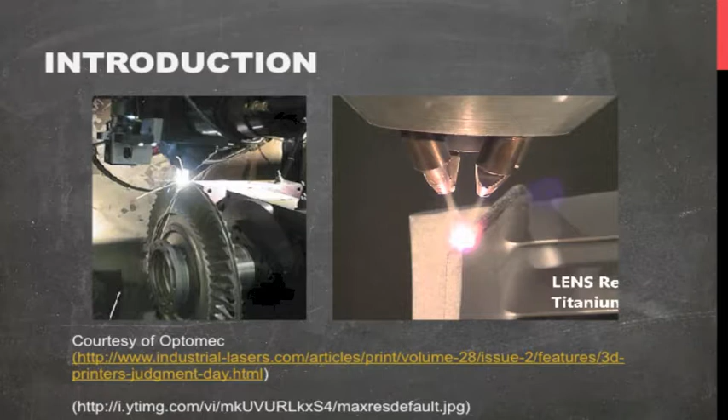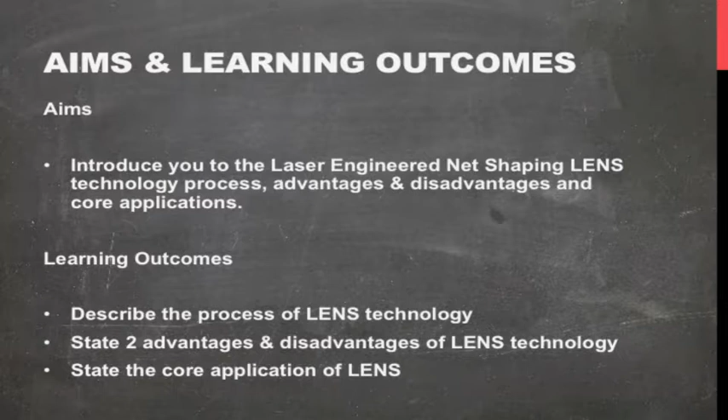So the aims and learning outcomes of this episode are very similar to the previous episodes: I'm trying to introduce you to the laser engineered net shaping technology, to understand its process, its advantages and disadvantages, and to know its core applications and use. So hopefully you'll be able to achieve these aims. So let's begin with understanding the process of this method.

The material used in this method is powder based. The powder is fed into a nozzle, and in this nozzle a laser is shined in the middle. The laser melts the base metal and the powder is deposited on this molten melt pool. As such, the part is built additively.

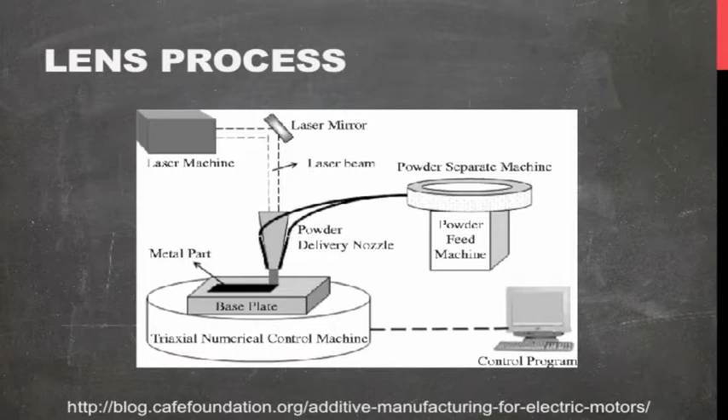The feature that allows the LENS process to repair components is that the base plate can move in different axes or it can rotate. So it allows the deposition of the powdered material onto surfaces that are not necessarily flat. So this is a very interesting feature.

Now if we look closer at the very specialized nozzle, you can see that this is very similar to some kind of welding mechanism. There are delivery nozzles for the powder, there's also a nozzle for the shielding gas, and the laser beam is shined in the center. So this is like a laser cladding, a metal cladding kind of process.

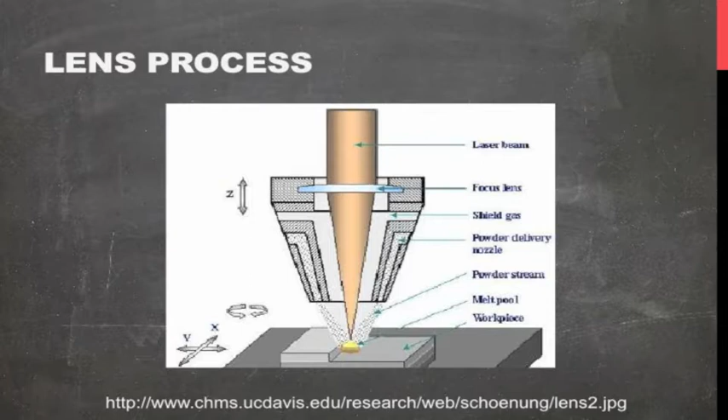So now let's move on to the advantages and disadvantages. For the advantages, the platform can move in various axes and planes, so it allows the additive deposition of the powder into the melt pool, which enables the repair of components. The second advantage is that since it is like a welding laser cladding kind of process, the build rate is very quick, and a wide range of materials can be used because you're basically just spraying the powder into the melt pool.

As for the disadvantages, firstly, output parts from this process have high surface roughness and the resolution is not so clear, mainly because the spraying effect is quite random. Another disadvantage is that it's probably quite hard to do overhang structures because you have to build support material. Currently I've not seen pictures of the LENS technology that show intricate support structures.

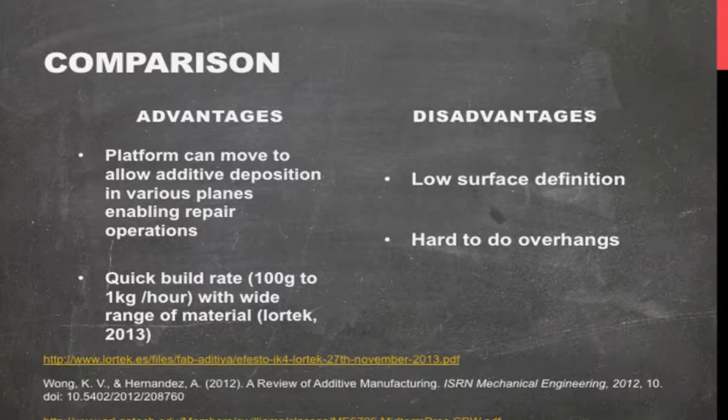So now let's move on to the applications. As you already know, the LENS system is very good for component repairs. This allows parts to be repaired quicker compared to conventional methods, where it would be quite difficult or almost impossible. Another application is that LENS could be used to create medical implants, like perhaps an entire bone.

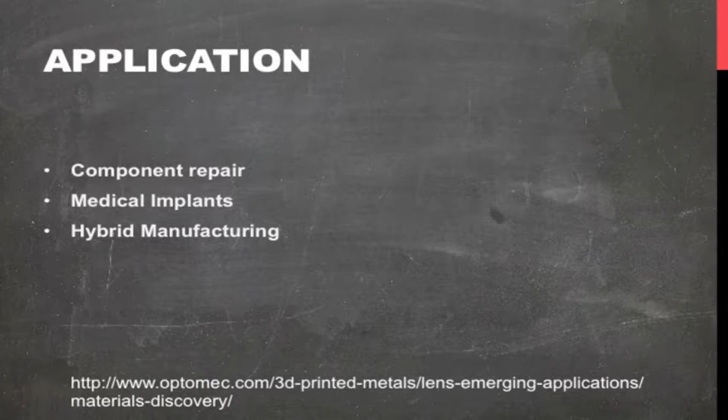Next is its use in hybrid manufacturing, which is quite similar to the repair application. Firstly you build the part up additively, and then you use subtractive machining to ensure the surface finish is very good. So this utilizes the advantages of both additive and subtractive manufacturing. This is actually quite a promising application, I'd say. So yeah, moving on to the summary.

I'm not sure why, but I'm feeling a bit tired on this video. So I'll just try to bang my head against the wall and get this video out.

So I hope you learned a bit about the process of LENS, even though I'm not very sure on this technique, and I hope you know its advantages and disadvantages, which I searched on the web, and the applications relating to it.

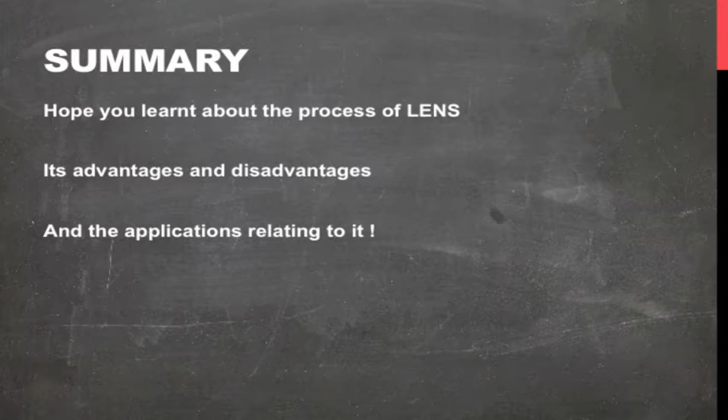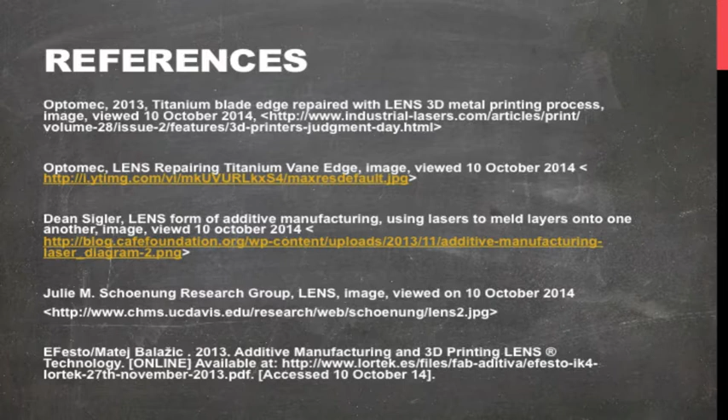And next will be the references. Once again, I thank all the references, because all the images and information I use would not be possible without them. Firstly, Optomec, which is the inventor of the LENS process. Then Dean Sigler, which showed us the process of the LENS system, and the Julie M. Schoenung research group, which shows a more detailed view of how the LENS nozzle actually works. Then we have eFesto, which gave me the information on the quick build rate of the LENS system.

Moving on in the references, we have Wong and Hernandez, who tell me about the advantages and disadvantages, and also the Systems Realization Laboratory by Christopher Williams, who also gave me information on the advantages and disadvantages of the LENS system. Lastly, thanks to Optomec again for their webpage on the core applications of the LENS system.